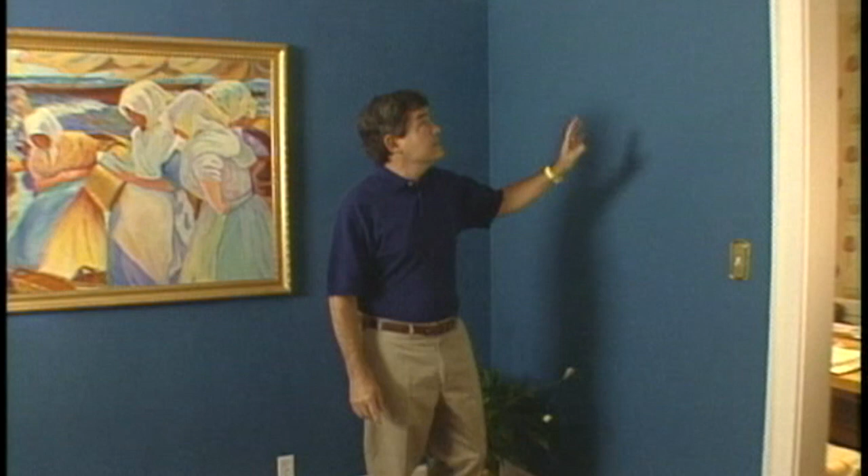Experienced installers develop a form of X-ray vision, the ability to look at an existing wall, ceiling, or floor and know what's inside of it. When visualizing a wall such as this, you need to be able to visualize the most likely framing behind the surface, how to easily route cables through that structure, and to visualize what other services are already in the wall.

To help you develop your sense of X-ray vision, the first thing we're going to do in this part of the course is a brief review of how houses are built, focusing on the areas that will affect your installation the most. Even if you have experience in new construction, you probably haven't paid much attention to exactly how houses are built, and it's unlikely you have any exposure to older construction techniques. So let's start with a brief review of framing.

In North America, you'll encounter two types of house framing: balloon framing and platform framing. Balloon framing was popular in this country from the late 1800s till about the mid-1900s, around World War II. After World War II, platform framing became much more common due to unified building codes and the dwindling supply of quality dimensional lumber.

In balloon construction, a board called a sill plate is laid directly on top of the foundation wall. Floor joists are then laid on top of the plate, and exterior wall studs are nailed directly to the joist to create the first floor frame. These wall studs may extend all the way up through the second floor to form the second floor framing as well. The joists for both floors are tied directly into the exterior wall framing as well as any interior wall studs.

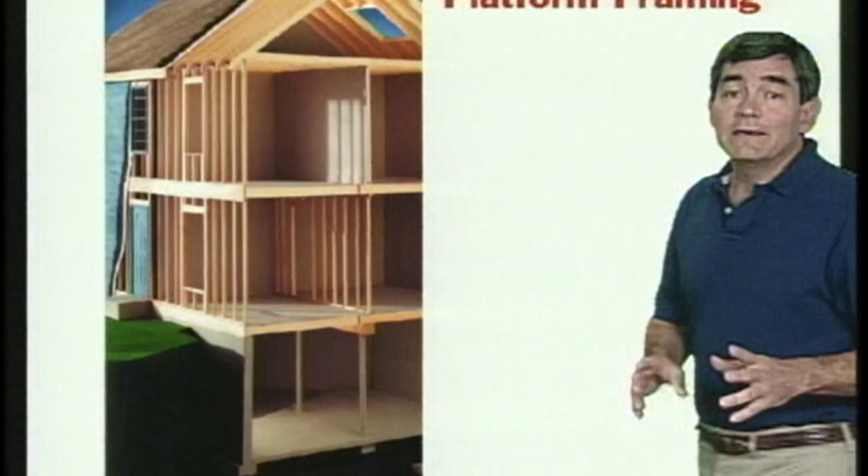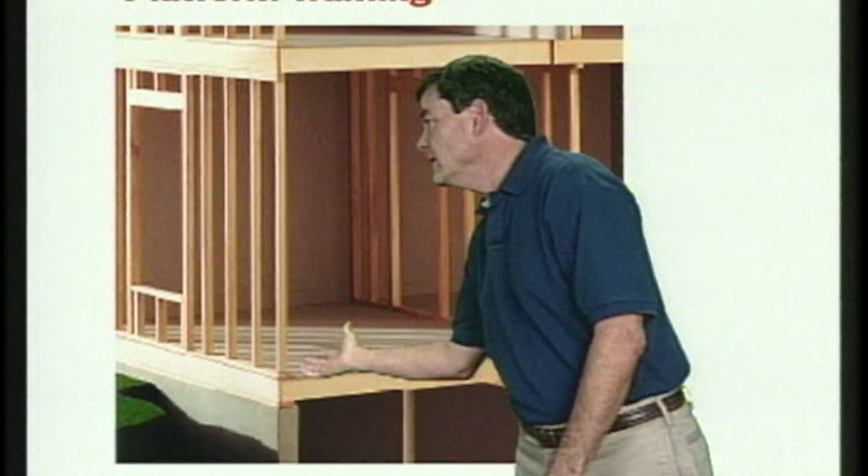Platform construction gets its name because each floor is built as a platform or deck. The sill plate is laid on top of the foundation wall, and the platform is built with joists covered by a plywood flooring material. Exterior walls are then fabricated as a unit, with the studs connected to a top plate and a 2x4 bottom plate, and the whole thing is tilted into place, then the bottom plate is nailed directly to the deck. The second story of a platform house is simply a repetition of the first floor, nailed on top.

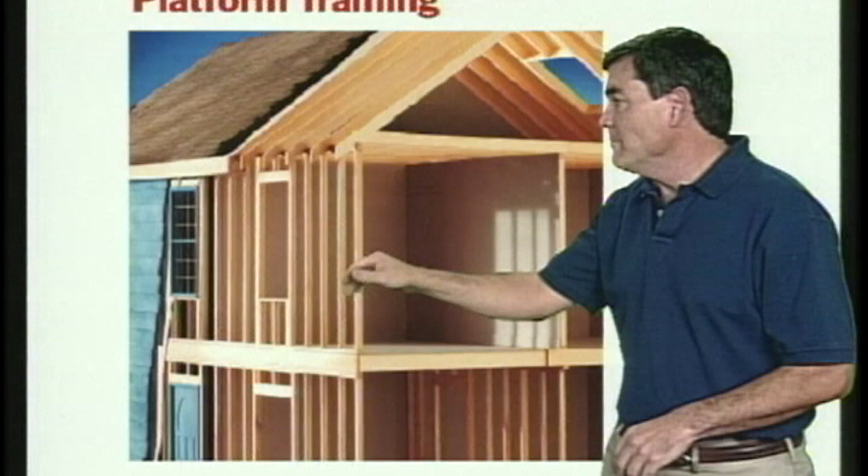A significant amount of the strength in a platform house actually comes from the exterior wall material. Though both systems use studs spaced at 16-inch intervals, you'll find more attention to this 16-inch rule in platform framing rather than in balloon construction.

Now let's start from the bottom up in both house types to show you the details of how they're framed and how to run wires in those framing spaces. The foundation of the house will either be a basement, a raised foundation with a crawl space, or a slab on grade, depending on when and where the house was built.

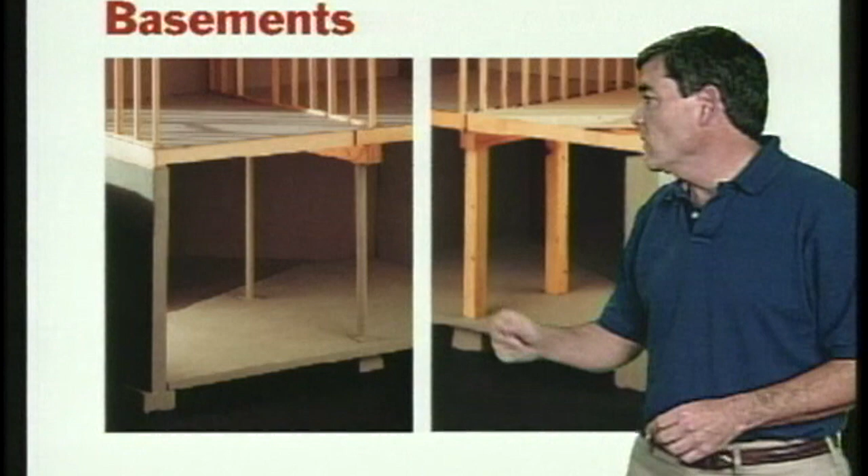Typical basements are usually 8 feet high, constructed of either concrete blocks or poured-in-place concrete. This obviously makes it a heck of a lot easier when it comes to getting wires up and into the walls. A raised foundation usually lifts the first floor platform about 24 inches off the ground, and again, the foundation is either concrete block or poured-in-place concrete. Like the basement, you've got access to the underside of the first floor, but there's not a lot of room to work in.

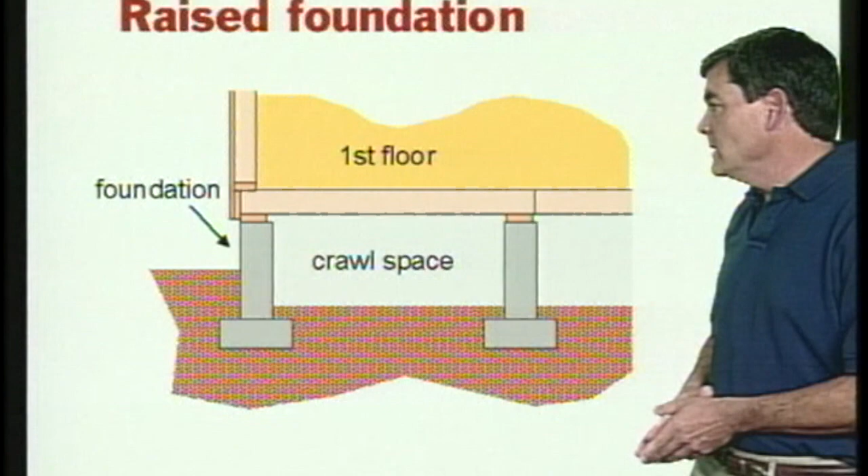Slab on grade is exactly what it says: it's concrete poured directly on the ground. Not much help to us here.

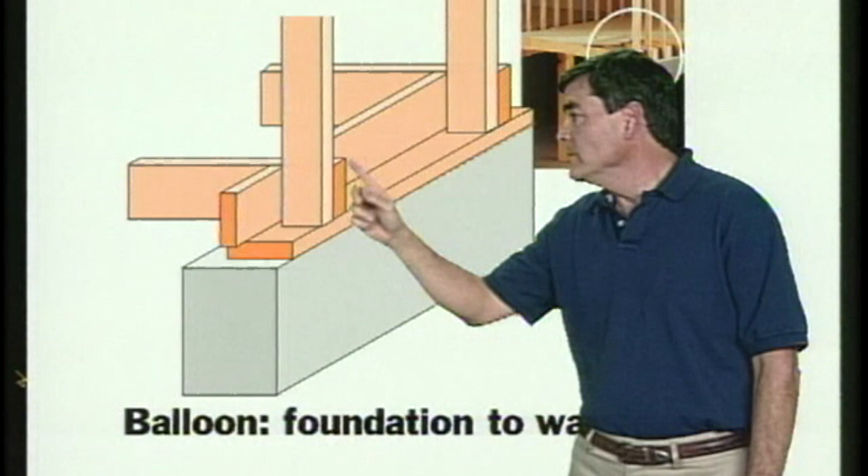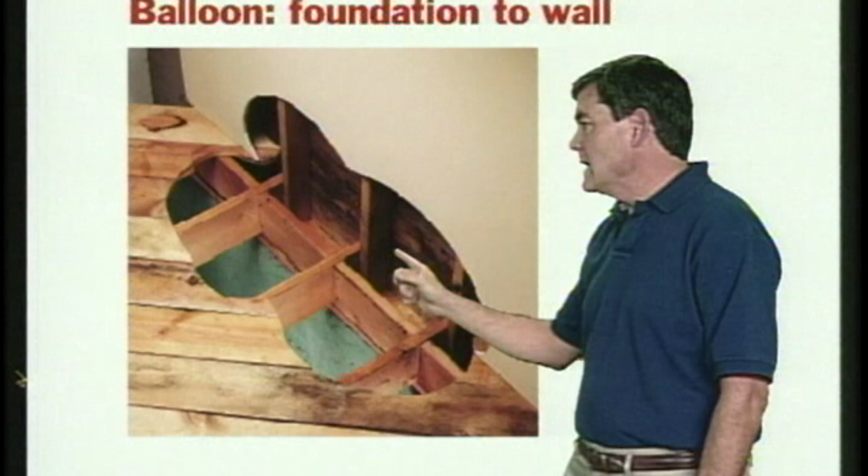In balloon framing, the wall studs and floor joists are tied directly on top of the foundation wall. There may or may not be a fire block board on the inside of the crawl space or basement. Wood floor planks are nailed on top of the floor joists, and these floorboards usually go all the way over to the outside of the wall surface. Because it's very open, this construction makes it easy to get wires up the wall from underneath the house or crawl space. You may have to drill through this fire block board if there is one, but it's still pretty easy.

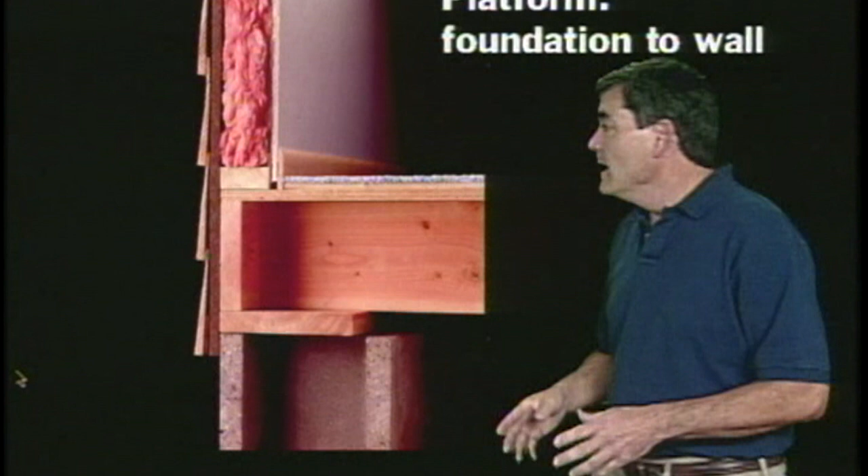Again, in platform construction, the deck is built on top of the foundation, on top of the sill plate, and the exterior wall is nailed to the deck. This makes it a little trickier to get up the wall since you have to go through the flooring material and into the bottom plate of the wall.

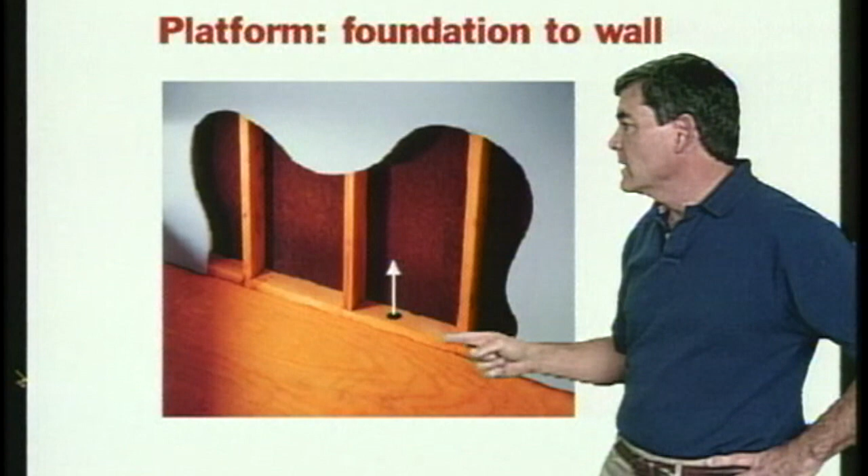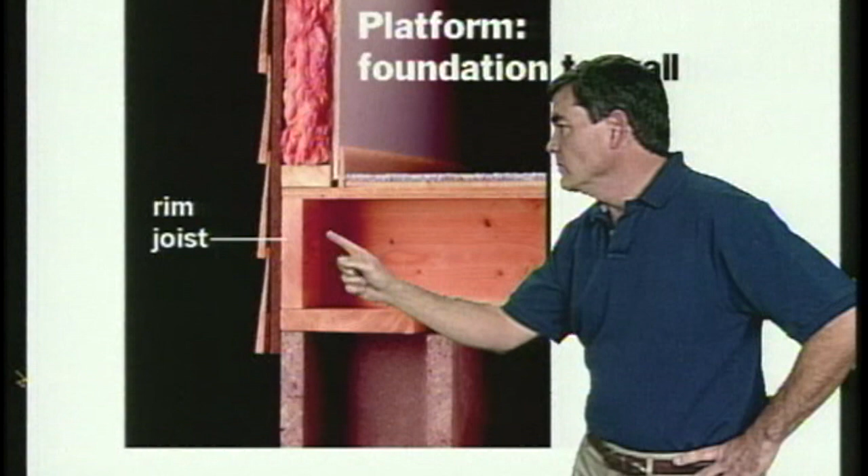The problem is the plate's always on top of the flooring, so you're not always able to see exactly where to aim. The trick is to keep as close as possible to this rim joist, as it's called. That will get you close to the center of the bottom plate.

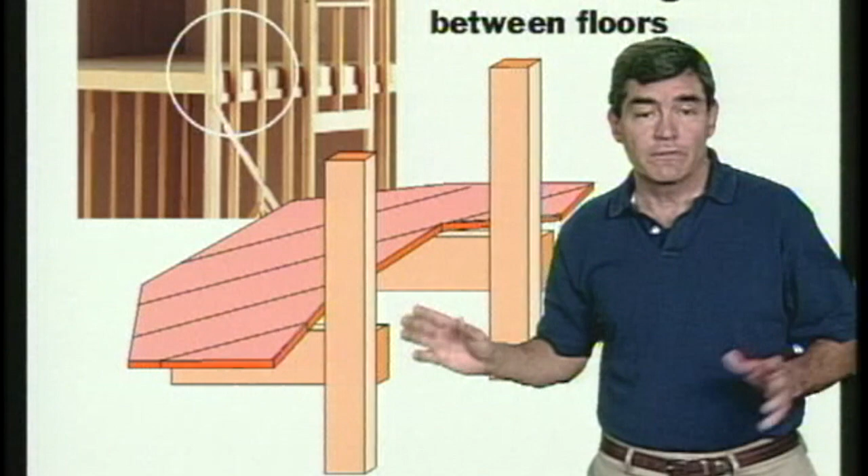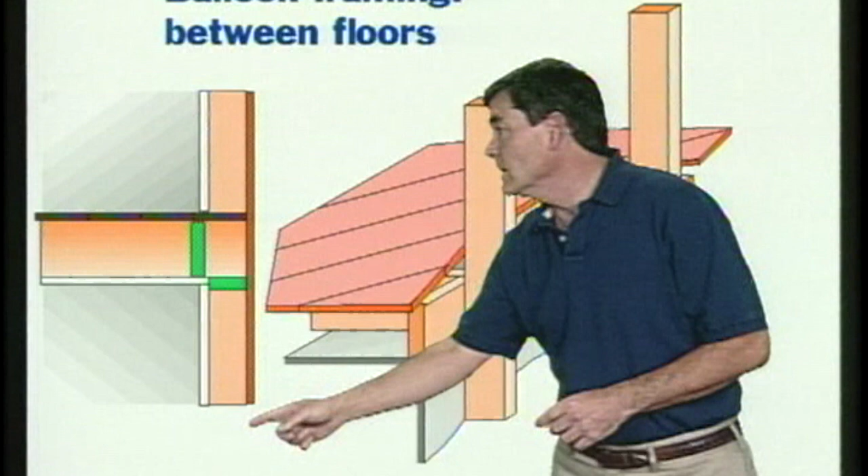Moving up the wall in balloon framing, the second floor joists are tied into the outside wall studs, just like on the first floor. In many older homes, this makes a completely open, straight shot from the first to second floor. In some construction, you may find an in-wall fire block located here or here, and the second floor flooring boards will extend out to the wall surface, but in general, it's very easy to get between floors. You'll see examples of this in Part 3.

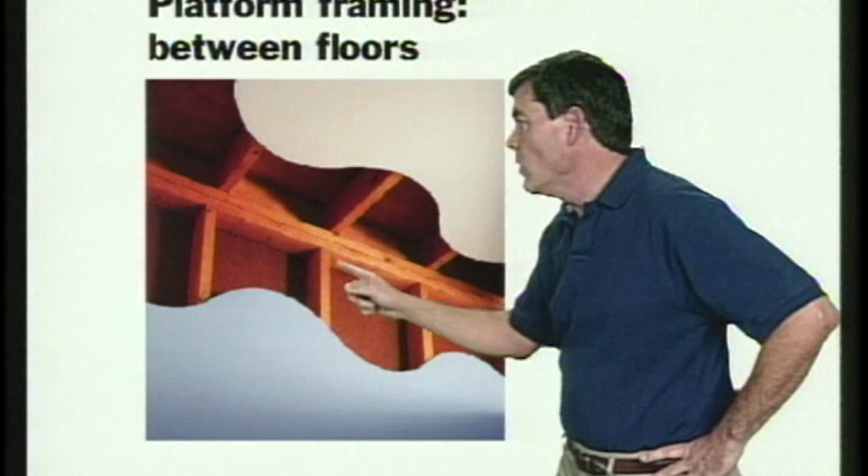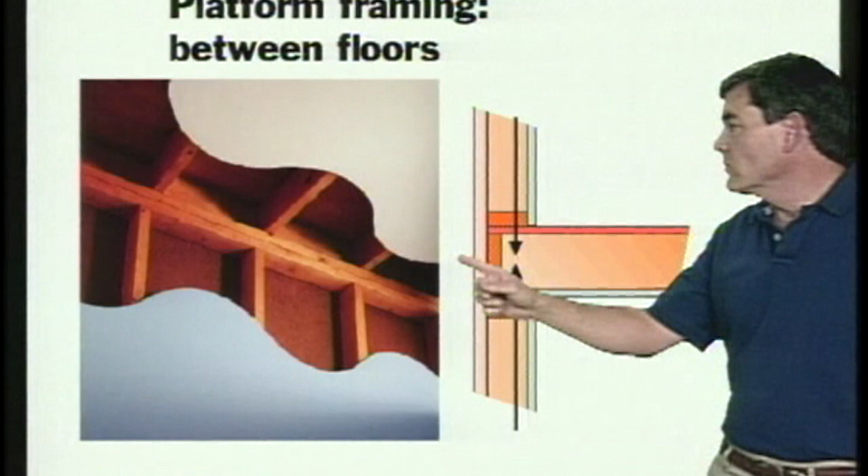In platform framing, the second floor platform is built right on top of the first floor walls. On all of these load-bearing walls, you'll always find a double 2x4 top plate on top of the wall. To run between floors means making holes in the top and bottom plate, staying just inside this outside rim joist. We'll show you how to do this in Part 2. Once you've drilled up or down to get into this floor space, it's a clear shot across the first floor ceiling for things like in-ceiling speakers.

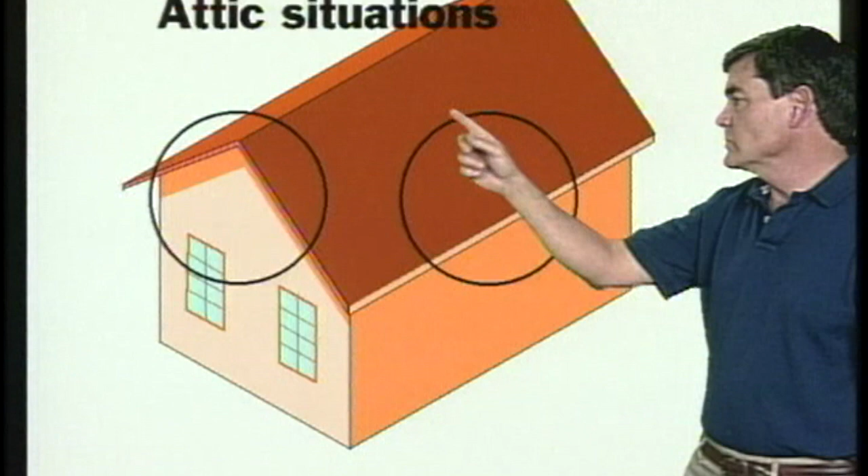The framing where the exterior wall meets the roof is similar in both construction types. There will always be a double top plate on the exterior wall where it joins with the ceiling joists and the roof rafters. There are two general situations you'll encounter: the end of the roof, where the wall is parallel to the rafters, and where the rafters rest directly on the supporting walls. The easy one is where the wall is parallel with the rafters on the end.

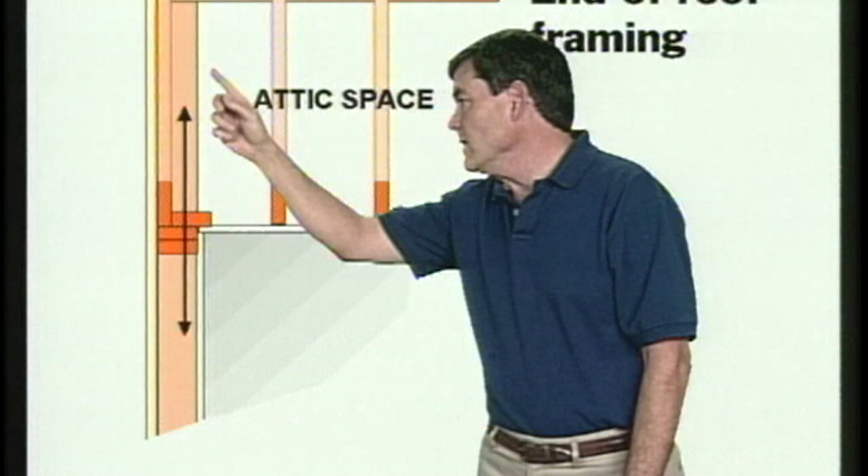It's easy to drill up into the attic or down from the attic into the wall, and there's even usually space to stand up in.

Then there's the situation where the rafters rest directly on top of the wall plate. This makes it hard to drill down from above because of the real tight quarters in here. But it's fairly easy to drill up into the attic space, though you've got to be very careful. If you go just a little too far, you'll wind up in outer space.

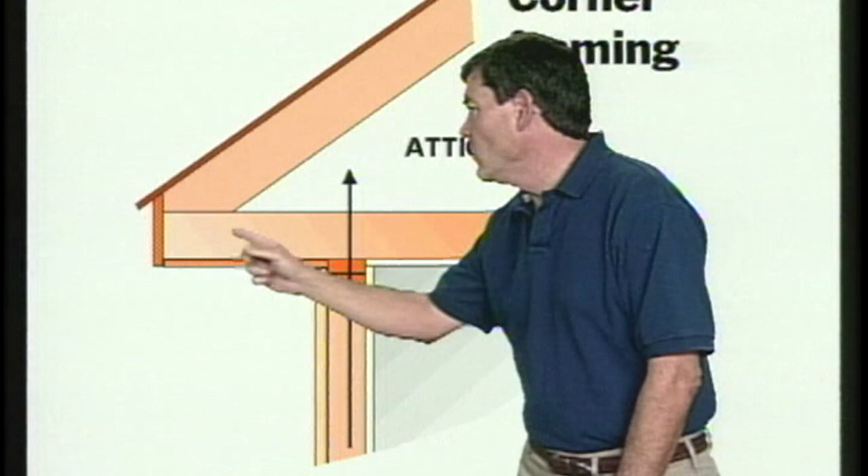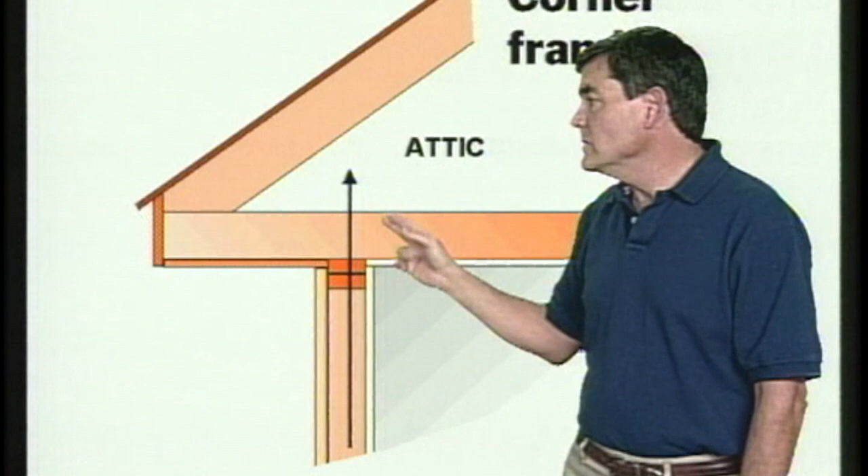The better situation is where the ceiling joists extend out from the exterior wall and the roof rafters are tied onto the ceiling joists. This gives you a lot more room on top of this exterior wall, and it's usually very easy to find these wall plates underneath the attic's insulation.

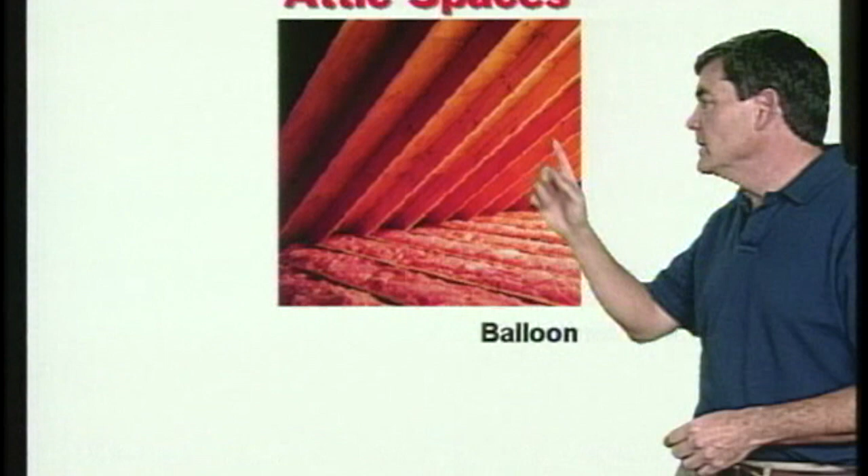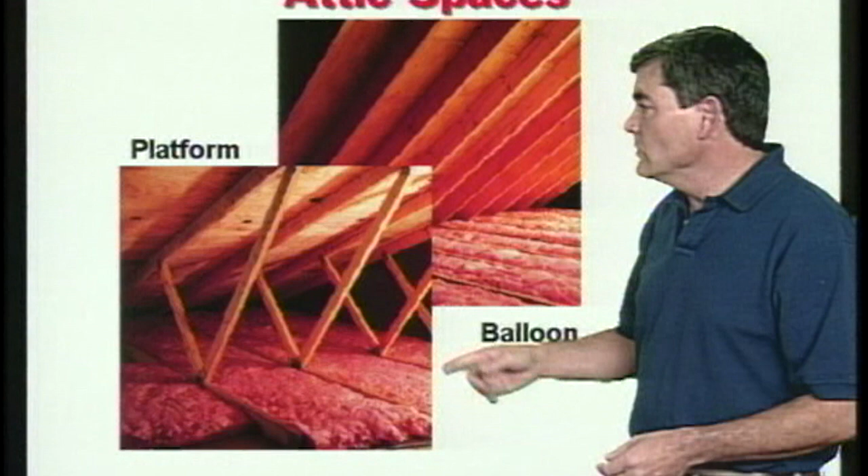The nice thing about working in older balloon frame houses is that they typically have large, unobstructed attics, since the roof joists are large, there's more of them, and they don't need as much interior support. Platform construction, on the other hand, typically uses roof trusses because they're low cost and easy to install. Here you'll usually find adequate crawl space, but it can be a real nuisance and sometimes a hazard to work in.

Now let's look at the framing for doors and windows, the most likely place for security sensor installation. The framing for platform and balloon construction is very similar here as well.

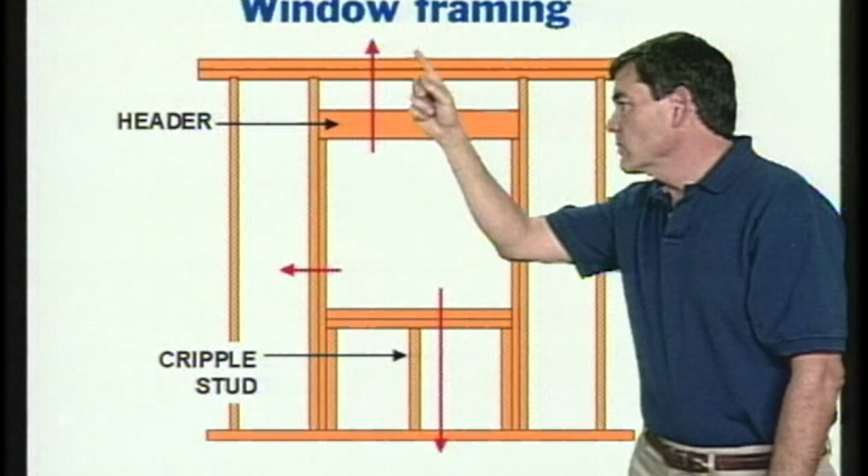The window framing will always have a header above to carry the load to double studs on each side. The header is typically a couple of 2x6s or 2x8s on end. The bottom or sill plate may be one or two 2x4s. You'll always be drilling through the existing window frame either up into the attic, which means drilling through the header, or sideways into the adjoining wall cavities, or down into the basement or crawl space. Except for very small windows, there will always be cripple studs above and below that you'll have to watch out for.

The framing for doors is very similar. There will always be a header above, 2x6s or 8, and one or more cripple studs to watch out for.

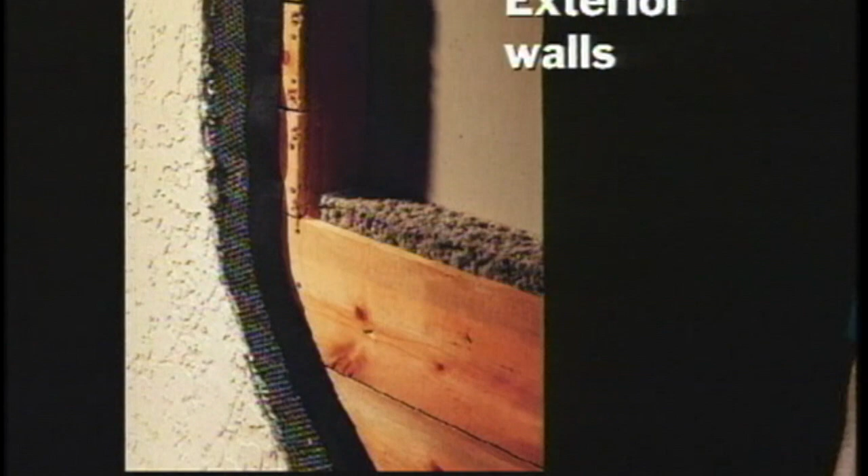The exterior wall covering in both construction types is wood sheathing. In the balloon frame house, the sheathing will probably be wooden planks. On top of this are overlapping layers of tar paper and then some final exterior covering.

In platform homes, plywood or OSB, oriented strand board, is going to be the exterior sheathing. Over this, there's going to be a moisture barrier installed, either tar paper, plastics, or some kind of foam board. And then finally, an exterior finish will be applied to complete the outside of the house.

We'll come back and talk about the insulation shortly. Now, let's take a look at the interior wall framing.

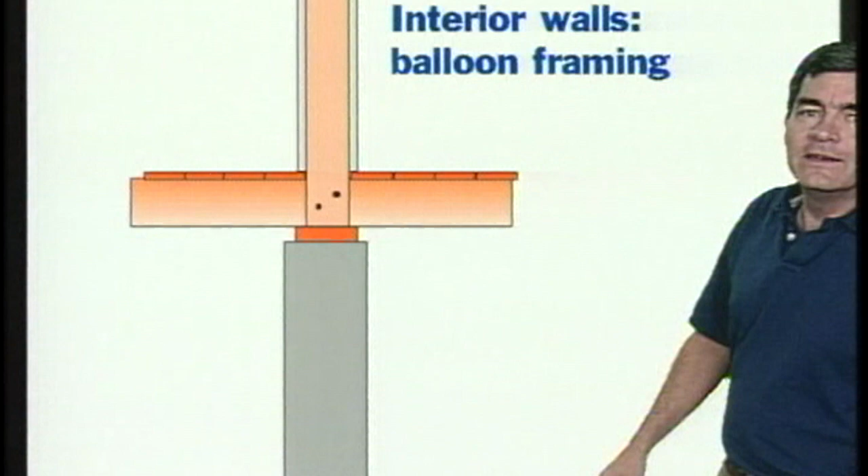Interior walls can either be load-bearing or non-load-bearing. A load-bearing wall is simply one that's supporting the structure above it, and a non-load-bearing wall isn't—it's just dividing up the space.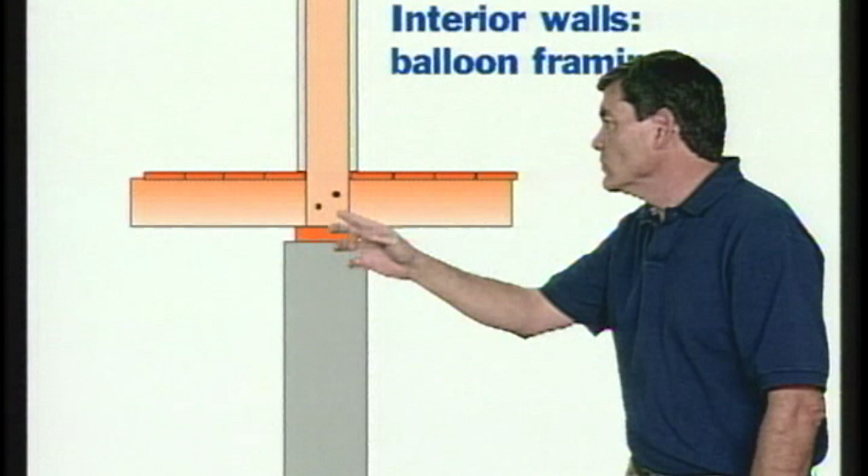In balloon framing, the load-bearing wall studs are tied into the floor joist, always over a foundation wall or beam. The nice thing is, this usually creates a nice open space right up the wall, allowing easy access.

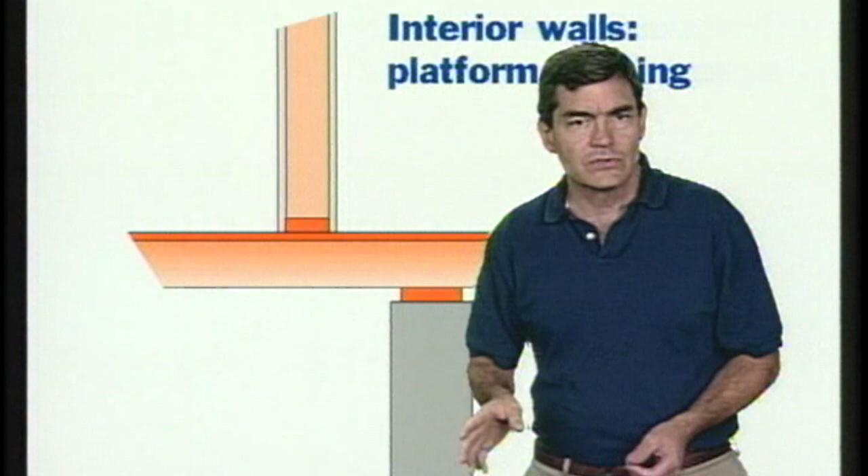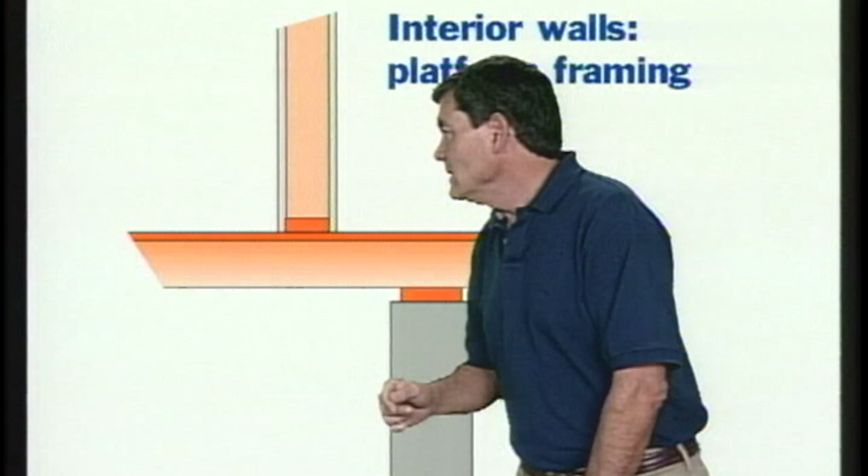In platform construction, the interior walls, load-bearing or not, are always built on the platform and may be difficult to find from below or above. Even if it's load-bearing, it may not be built over a supporting structure.

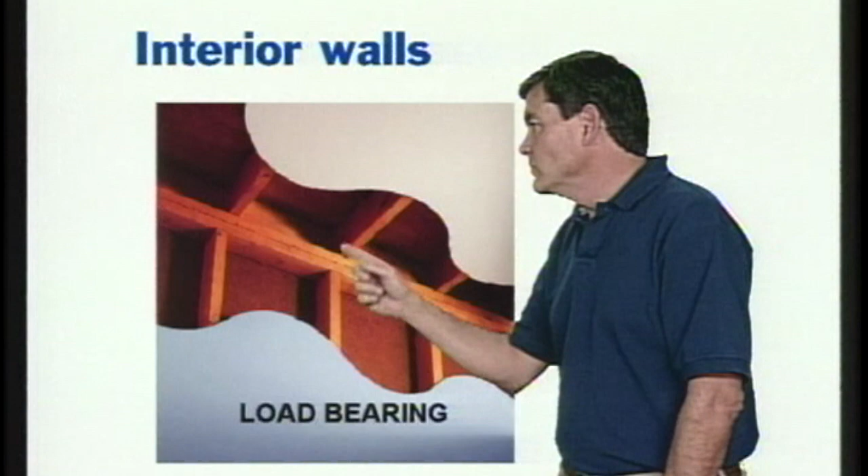At the top, a load-bearing wall will have a double top plate with joists resting on top of it, while a non-load-bearing wall will have a single plate and the joists are never resting on the wall for support.

Since you'll be making many openings in existing walls, not all of which are planned, it's essential to understand how interior walls are covered. Here, there are big differences between balloon and platform construction.

Up until the 1940s, interior walls were covered in what's called lath and plaster. The lath base is a series of rough wooden strips nailed to the studs. These strips run horizontally across the wall, up and across the ceiling, spaced about a half inch apart. On top of that, there's a heavy coat of plaster which is forced into the cracks of the lath, and on top of that, there's generally one or two layers of fine plaster.

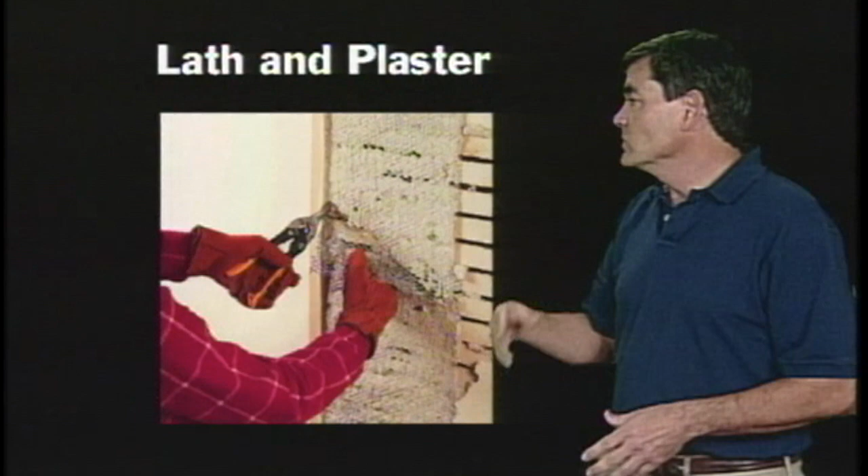Now, because this was done in layers, it can come off in layers, so you have to be careful. In some lath construction, you may also find a layer of wire mesh on top of the lath as well—just one more challenge in getting through the wall.

Now, making a hole in wooden lath can be tricky if you don't know how to approach it. You can cause a lot of damage if you try to use something like a saw. Cutting through with a saw will invariably cause these boards to vibrate, causing cracks in the plaster. A routing tool works best here, and we're going to show you how to use it in part 2.

By the 1950s, wooden lath was replaced in many areas by a cement wallboard material. This was covered with one or two layers of plaster, finer plaster coating as well. It still requires care in making holes to prevent cracks, and we'll show you examples of this in our Michigan home in part 3.

Drywall, or sheetrock as it's often called, is what you're familiar with today, and as a general rule, is the interior finish you'll typically find on all platform frame houses. It's easy to make holes in this material with a drywall saw or a routing tool.

The hassle with installing cable in exterior walls is insulation. The amount of insulation has increased steadily over recent decades, and homes built since the 1960s will always have insulation. It seems like almost everything has been tried for insulation, from peanut shells to expanding foams. But let's take a look at the most common types you're likely to encounter.

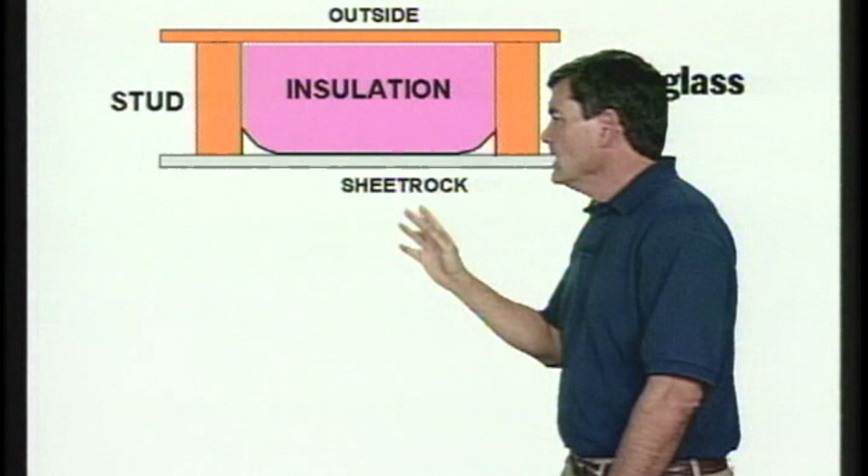Fiberglass batts, as they're called, are designed to fit right in between the wood wall studs. The batts have a foil and paper surface, which lets them attach directly to the wall studs to hold them in place. Batts may be stapled directly to the inside of the stud.

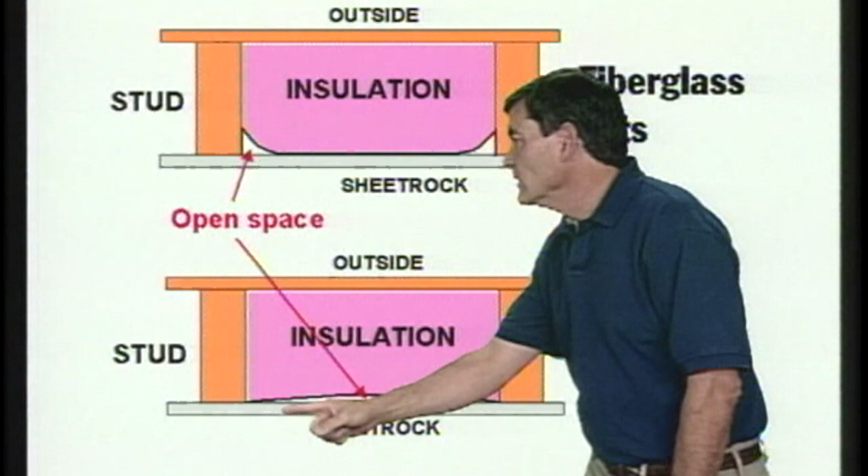If so, this leaves a little space between the insulation and the sheetrock that you can get your wires run. If the insulation is stapled to the outside of the stud, this still will often leave a small gap between the insulation and the sheetrock, and this is a place to run wires as well.

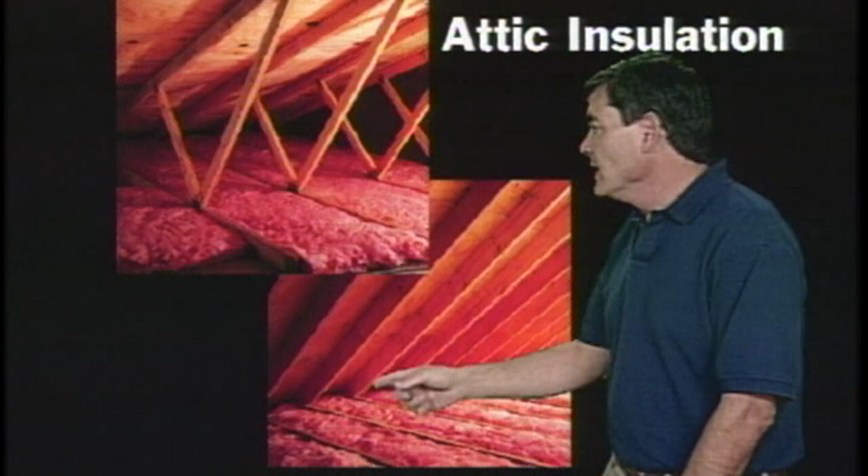Attics are also well insulated, and this can be a real nuisance. Here you'll find rolled fiberglass, loose fill, or blown-in materials. In older homes, the insulation could be thin and settled over time, allowing you to see the top of the ceiling joist. But in newer homes, the insulation may be a foot or more thick, making navigation in this area like hiking in a fog. Remember, when working with any of this insulation material, be sure to wear an appropriate breathing mask and eye protection, even if you're just doing an estimate, because this stuff can be real nasty.

While the majority of homes are built with wooden framing, you'll occasionally have to deal with an alternative building system such as concrete block, concrete forms, steel framing, or structural insulated panels. By far the most common, concrete block construction pretty much says it all: solid walls of concrete block that may also be filled with concrete for extra strength.

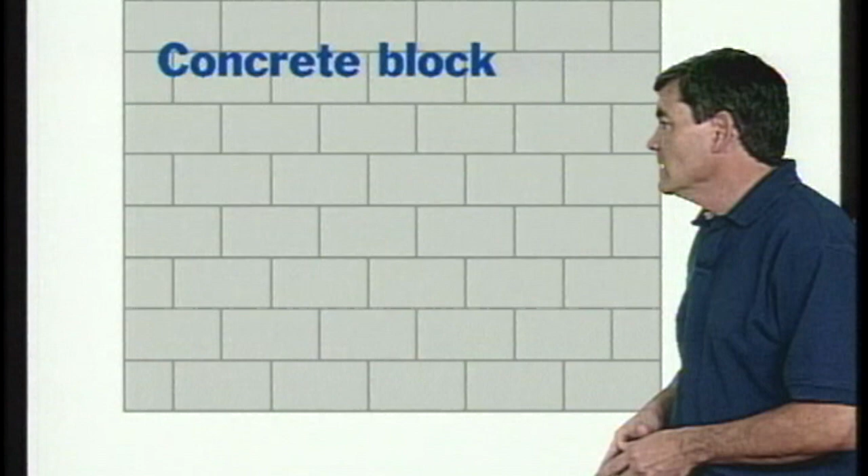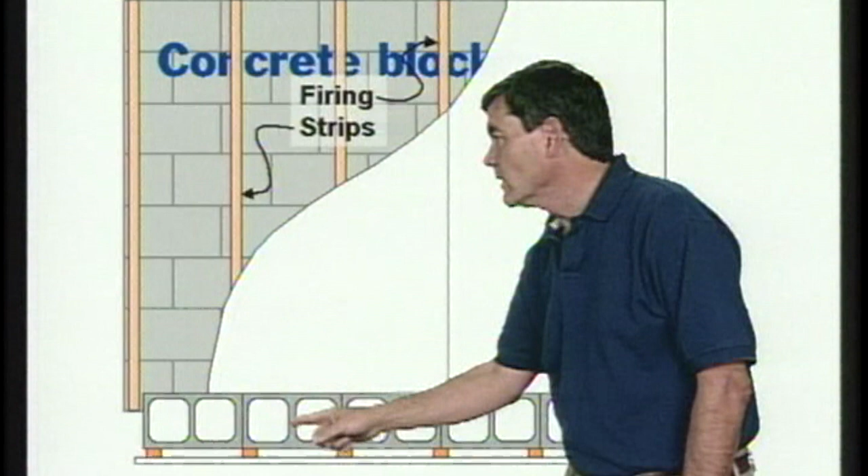This definitely rules out running cable inside the wall. But if you're lucky, the inside surface of the wall will be finished with 1 by 2 inch furring strips, used to mount panels of drywall. If this is the case, you can possibly use the cavity between the concrete block and the sheetrock to run your cable, and we'll show you an example of how we did this in part 3. But it's not uncommon to find a layer of foam insulation between the drywall and the concrete. In warm climates, the concrete block is just going to be painted, finished, or plastered.

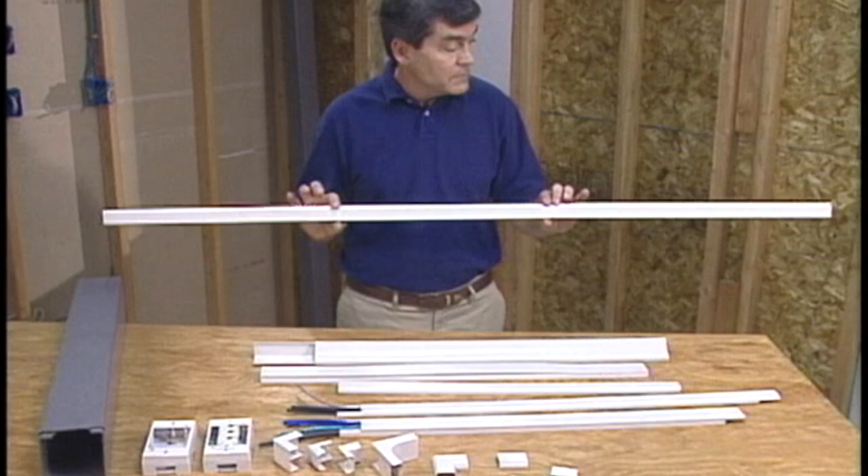In either case, your best bet may be to use a surface raceway. Surface raceways provide an enclosure to mount cables on the outside surface of walls. They come in various shapes and sizes, both in metal and plastic, to accommodate various quantities and sizes of cables. Some of the most convenient raceways to use are these plastic channels made by Carlon.

They come in both rectangular and tapered shapes, in both 5 and 10 foot lengths. They're real easy to mount - all you have to do is pop the cover off, install them with screws or the self-adhesive backing, run the cable, and the covers just snap right back on, making for a real easy installation.

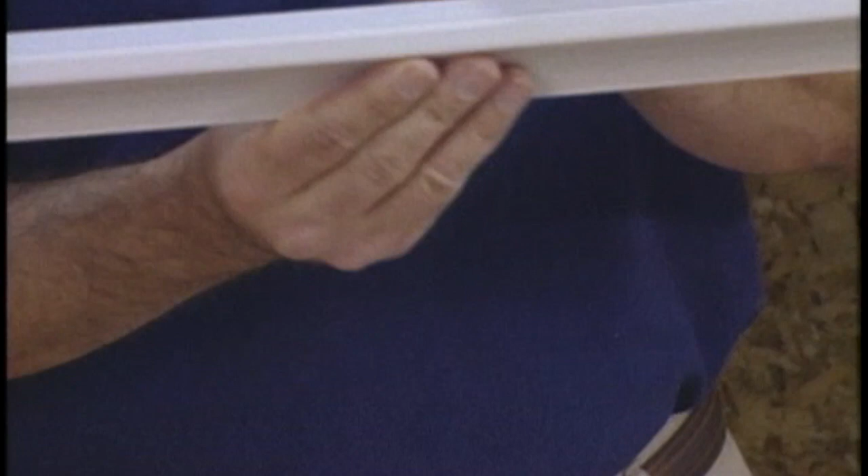They also make this rather unusual cove-shaped channel. This is designed to mount between the ceiling and the wall to look like molding, and when installed, it's almost invisible. You can also mount it between adjacent walls in the corner as well.

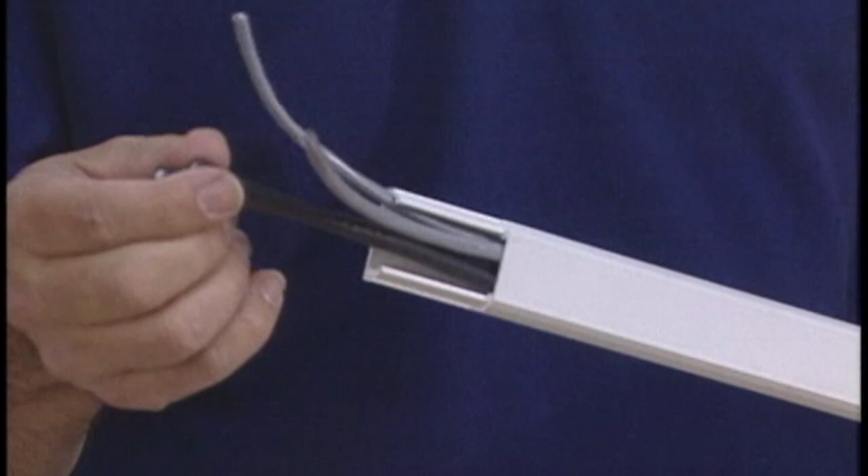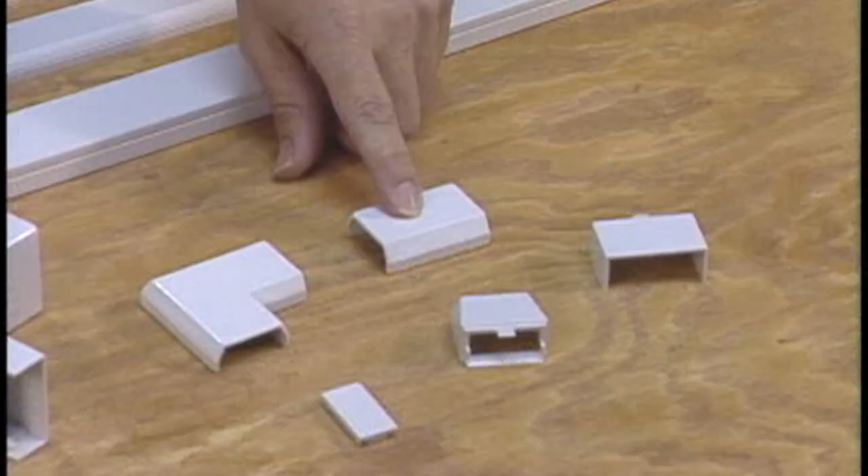This small tapered channel can easily accommodate 2 RG6s and 2 Category 5 cables, and the rectangular raceway has plenty of room to handle that, plus additional cables such as speaker cables. There's plenty of installation hardware to make your installation look good, like transitions, right angle bends, inside and outside corners, and they make a variety of surface mount wall boxes in various depths. These are designed to handle standard outlet hardware.

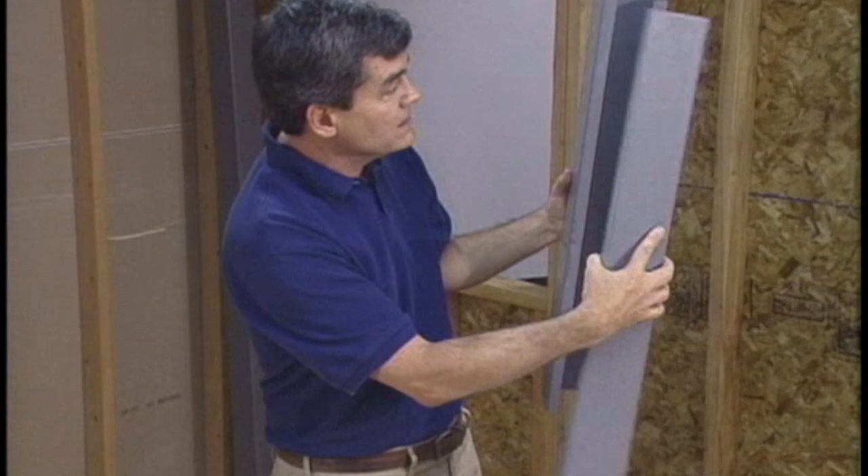There's also much larger channels available, such as this 4x4, and the only difference is it's just designed to handle a lot more cables. It comes in various colors as well, mounts the same way, and has an easy snap-off cover. This thing can be a real problem solver in installations where you have to make your own vertical chase between floors.

You can mount this thing in the corner of something like a closet, particularly where there are common walls between floors, to get cables from the attic to the basement. This thing is large enough to house all the cables you'll possibly need for a retrofit installation.

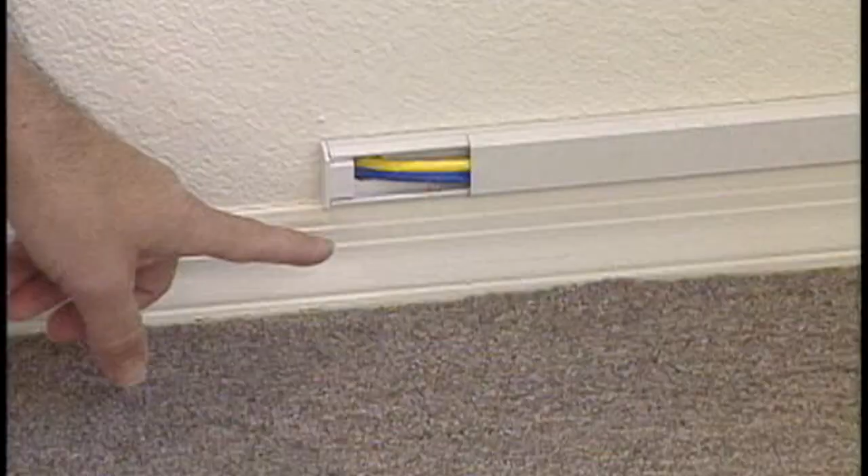This is a small but good example of how surface raceway can be used to solve a common problem. In our case, we used the channels to mount an outlet on this outside concrete block wall. We used the channels to bring the cable over from an adjacent wall, where we could get our wires down either from above or below. I cut a small piece of the raceway cover back so you can see how we made a hole into the channel, which allowed us to bring the cables from inside the wall directly into the channel. This makes a really easy and neat installation.

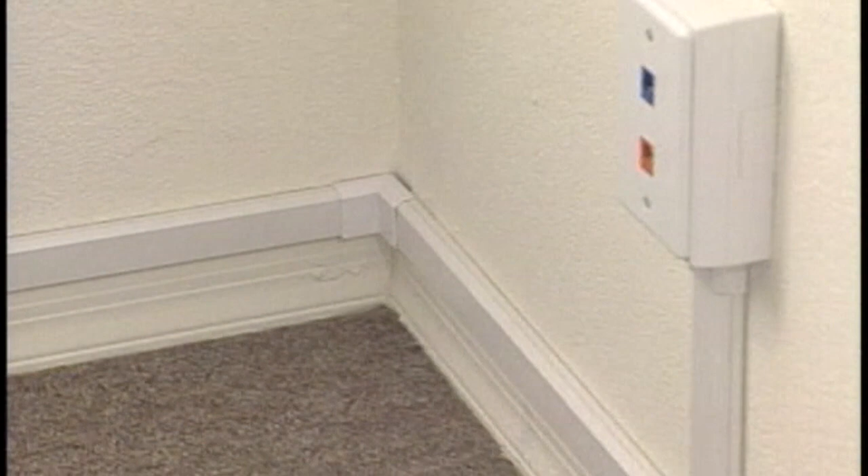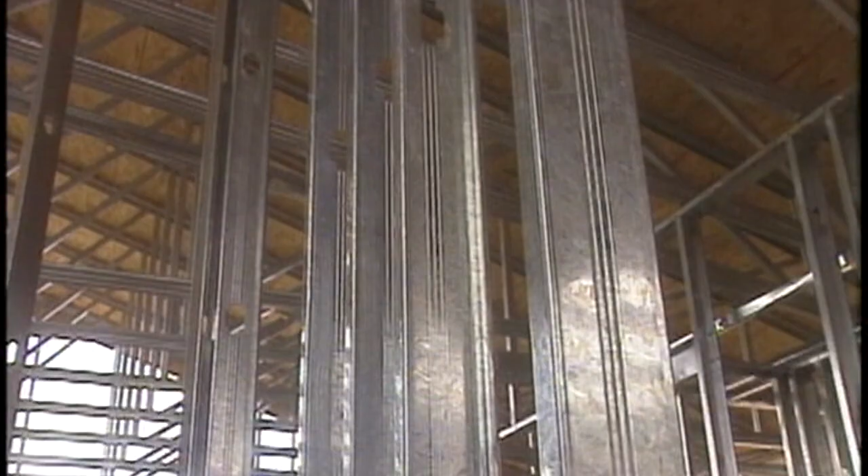Steel framing is a retooling of wood frame construction, with steel replacing wood in all framing elements. You'll typically only find steel framing in homes built within the last 10 years. A major consideration when working with steel framing is to keep from cutting wires on the sharp edges.

Now that you know how the house is most likely to be constructed, you need to understand where other services are located. Part of your X-ray vision skill is the ability to anticipate where other services such as ductwork, electrical, and plumbing are most likely to be located.

Ductwork takes up the greatest amount of in-wall space. It usually consists of plastic flex or sheet metal for all supply air ducts. Return air may run in ducts or partitioned-off areas of the wall or floor. You may be able to take advantage of duct space for running wires between floors.

In homes that have a flat roof and no crawl space, ductwork is usually accommodated in a drop ceiling or chase such as this, where the ductwork runs the entire length of the house, feeding rooms off of each side. This is really handy because it provides a space for you to run your wiring and also gain access to these rooms. We'll see an example of this in part 3.

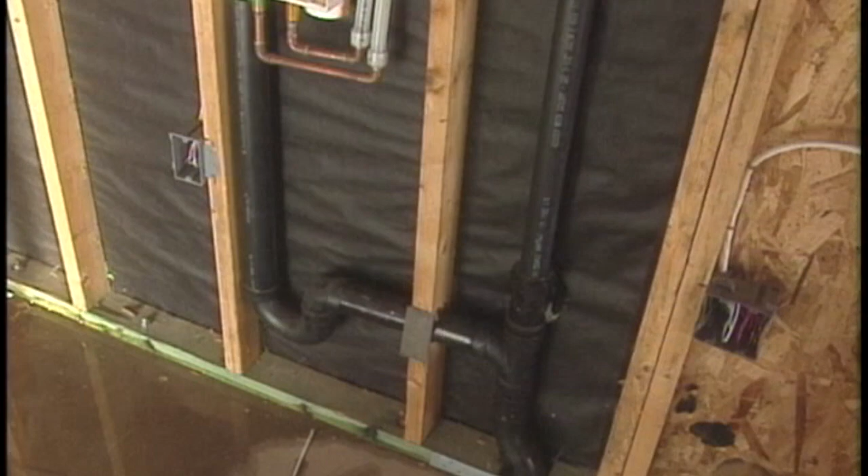Next comes the plumbing, including waste lines, drain vents, hot and cold water lines, and gas lines. Waste lines are either plastic or metal, usually 3 inches in diameter, and of course they always run downhill. All the waste lines are connected to air vent pipes, 2 inches or larger, that run to the roof. These are always in the wall above a bathroom or kitchen area.

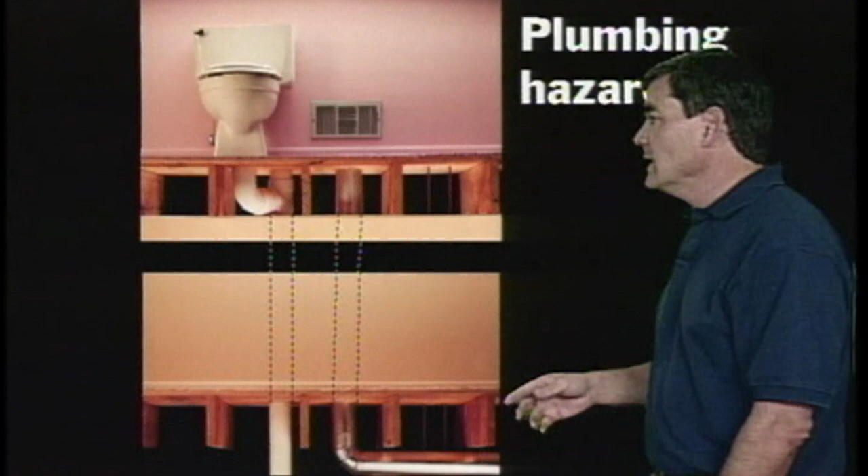It's also common for walls with drain or vent lines to be framed using 2x6s, a giveaway that the wall contains plumbing. The water supply lines are almost always 1/2 to 3/4 inch copper. In older homes, they might be iron or steel, and in very new homes they may be plastic tubing. That's a major hazard. It's always good before starting a job to familiarize yourself with the plumbing layout.

You can usually figure out the location of the major drain lines and even vent lines by knowing what plumbing or air vents are in the floor above and where these come out in the basement or crawl space.

If you have any experience with new construction, you should already be familiar with where electrical wiring is usually placed. The area of most concern is near the distribution panel, where a lot of wiring is concentrated. You want to make sure you know where the distribution panel is located and how the majority of the cables are routed through the house by checking in the attic and in the crawl space or basement.

About the time houses shifted to platform construction, non-metallic PVC insulated wiring, commonly referred to as NM or Romex, became the standard for electrical wiring. But in balloon frame houses, depending on when they were built, you'll find a variety of other wiring types, including BX, a flexible metal conduit with individual wires inside.

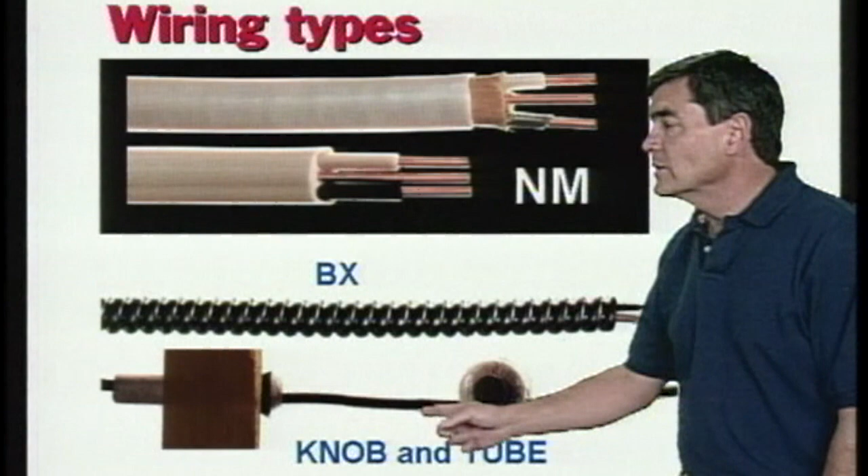And most troublesome, you may also find knob and tube wiring. Here, individual cloth-covered wires were run to switches and outlets. The wires use ceramic tube insulators through flooring and wall studs, and ceramic standoffs in attics and basements. Over time, this cloth has rotted away, so a lot of this wiring is now exposed in the walls. This can pose a real hazard if your drill bit comes in contact with an exposed wire, so be very careful with this type of wiring.

The point of this review of how houses are constructed and what's in the walls is to help you develop an installation plan for any house. Your plan will include a careful review of how the house is constructed, determining which walls, floors, and partitions you can and can't use, determining the location of outlets and devices and the distribution equipment, and developing a strategy of how to run wires and cables for the easiest installation, and developing a wire schedule.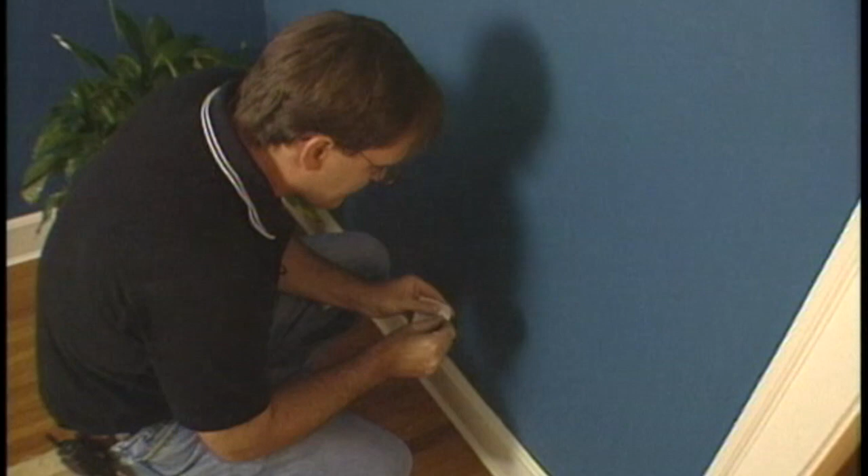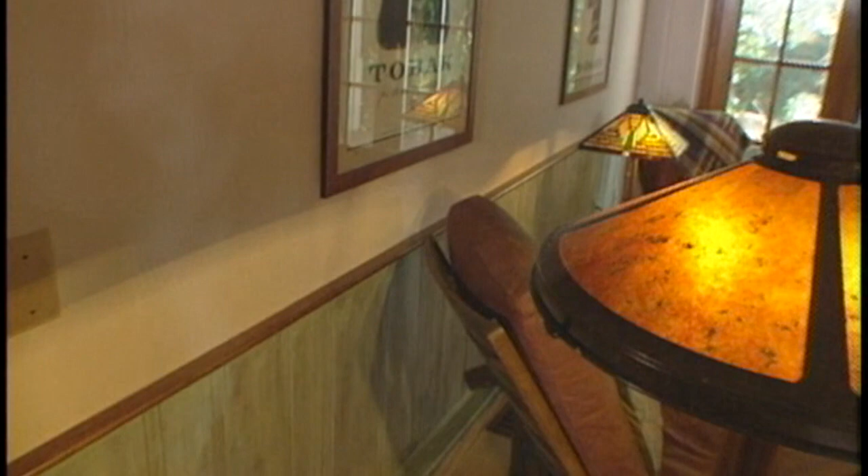After determining the house construction, the next step is to determine the location of outlets, keypads, and other peripheral devices. The process is nearly the same as for new construction. The challenge is determining whether or not you can get a wire to the outlet location. What kind of electrical and plumbing is in the wall? Where are the fire blocks or other obstructions? And how does the wall connect to ceiling and floors?

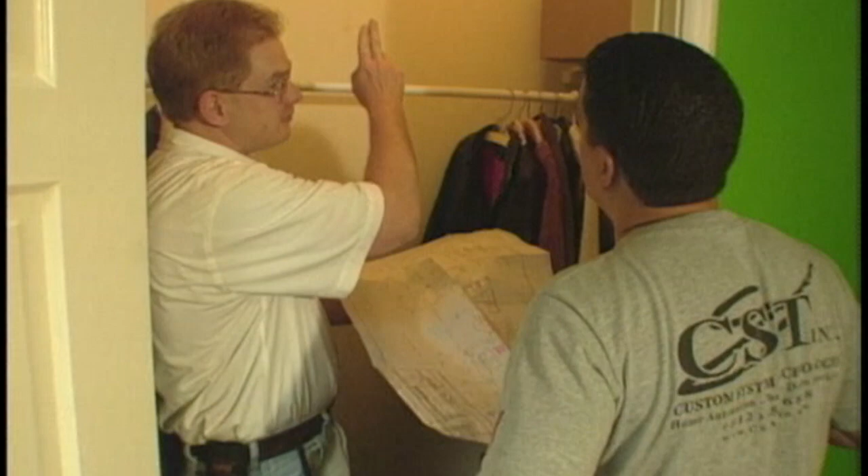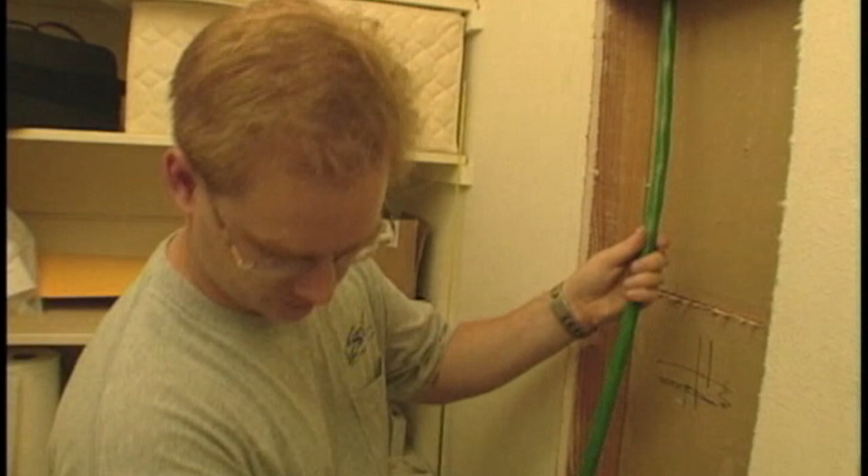The next step is to determine exactly where distribution equipment or panels should be installed. The considerations here are almost the same as for new construction. You want this to be a central location that's easy to get to for both you and the homeowner. Also consider how you can use or create vertical or horizontal chases from the distribution location.

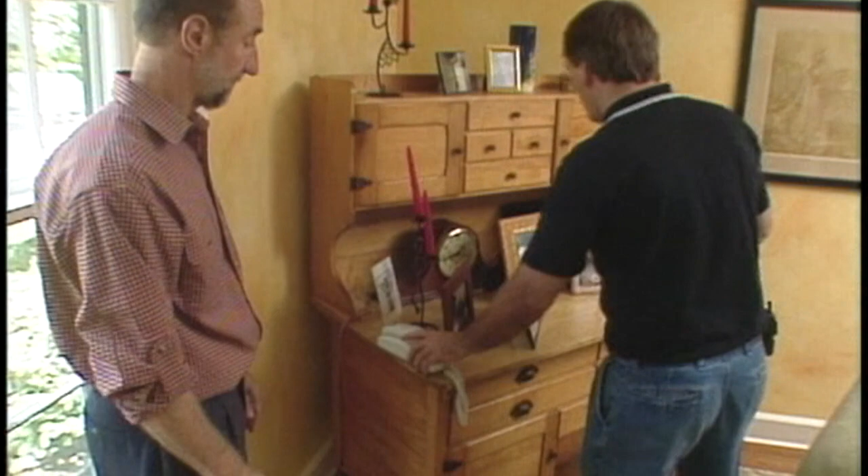Remember, the first rule of a professional retrofit is don't overcommit. Don't let the homeowner talk you into attempting to run cable to an impossible location. Don't hesitate to suggest locating an outlet on another wall if you know it'll be a better installation.